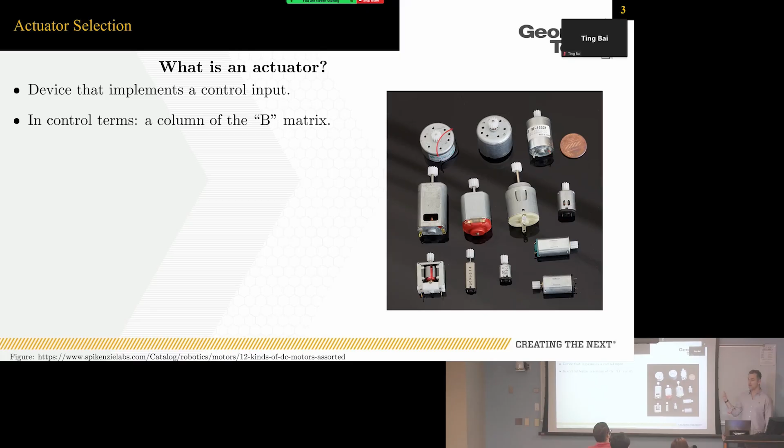If you have a linear system, okay? So if you have a linear system, x dot equals Ax plus Bu, the columns of the B matrix actually tell you the actuators, and your u actually will move those actuators.

Okay, so let's describe the first part of the talk, which is actuator selection. Actuator selection, why do we want it? The actuators, again from your class, are the implementation of the control inputs. They have to guarantee a sufficient level of controllability. So you have to make sure that I'm able to control my system when I go from point A to point B.

And of course, my research also takes care of resiliency, and this resiliency can be to faults, attacks, failures, and so on and so forth. And of course, I want to do that while I optimize the performance. So these are the three important things that I need to take care of when I do actuator selection.

Of course, everything though is model-based. If you check any paper on actuator selection, this is actually a very hard problem because the complexity increases with the number of actuators. And the complexity increases even more when you have to describe the model in a dynamical system way. So let's see how we can avoid doing that.

As I said before, in CPS, in cyber-physical systems, the system models are unavailable, or they might be inaccurate, or they can be time dependent, so they change over time. That's why we want to do actuator selection that doesn't involve the system models. So this gets me to the magic word here, which is called data-driven.

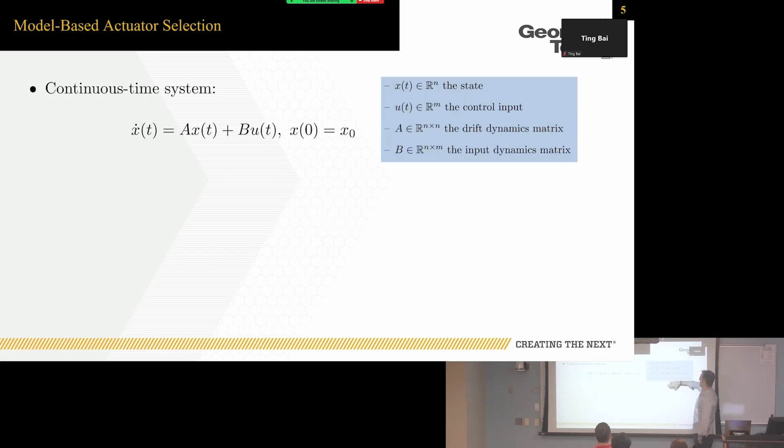Okay, so let's start putting some math now. We have done it for linear and nonlinear systems, but in linear systems you have a closed-form solution, you know how to compute it, you know it's actually correct. So let's go back to our 101. You have a classical dynamical system where x is the state, u the control input, and A and B, the drift dynamics and the input dynamics.

So let's see, if we had the model, what we can do when we do actuator selection. Remember, each column of the B matrix is an actuator. We have a fixed component, which we will call B0, the actuators that are already part of the system, and another component, which we will call B mathcal B, the actuators that need to be selected.

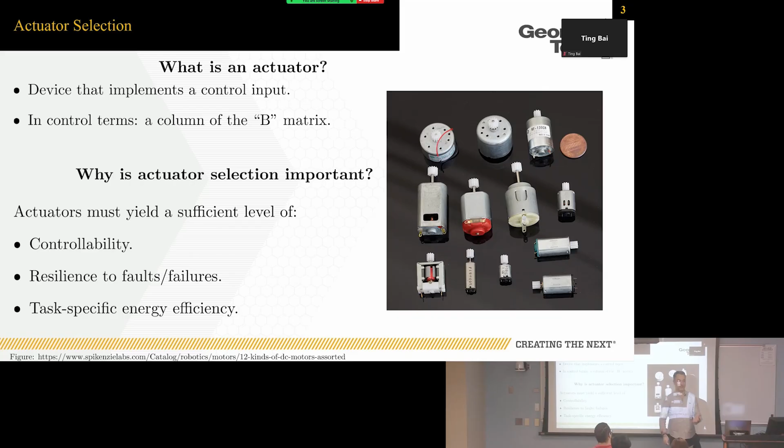So why would somebody need to select these things? Because of controllability and resilience. When I put more actuators in the system, I can get more controllability, more resiliency, and so on. Okay, let's go back to the math. I start with B0, and I'm going to play with this matrix here. So this is our problem for now: I want to choose these actuators here.

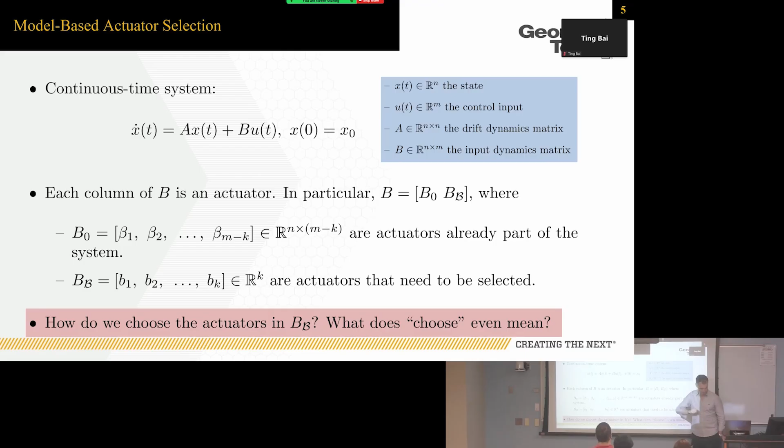So let's see what we mean. We have a pool of actuators, let's say there are n of them, and I want to select the best of them. In other words, k, a subset of n, and I want to select the best of them to incorporate into my system. So if I want to select the k best of them, I have to maximize the controllability.

Every time I want to incorporate more actuators into the system, I want to maximize something that quantifies controllability, and I want to do this optimization given that I have to pick k of them. Very simple optimization. Then, after we solve this optimization for B, I can set this B mathcal B there with these actuators.

Any questions? Okay, so now let's see actually how we can quantify controllability. So again, we go back to our optimal control classes, and we say, okay, I will define a minimum energy problem. And here you see that I only have the U here. And I do that on a finite horizon given my dynamics, initial and final condition. And of course, as you can expect, more controllable systems have smaller optimal values, right? Because I optimize this.

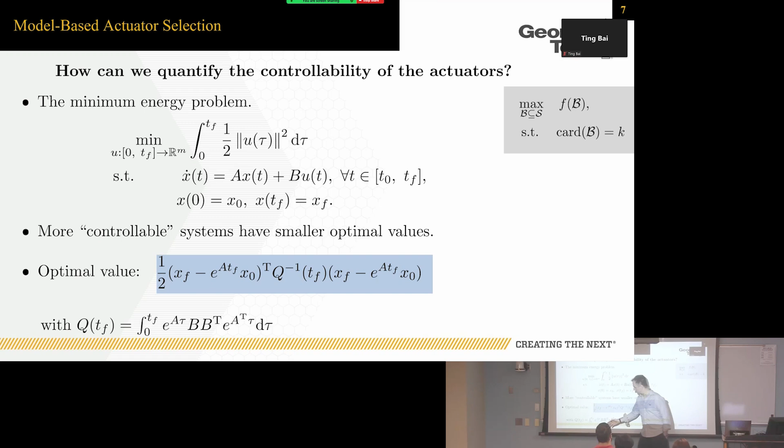So let's see. For now, I will try to model this f of B. The Gramian. Let's see what I can do with the Gramian. This Gramian will quantify how good my B matrix is, because I put the different components there, and the value of this Gramian will quantify how good my B is. So, as you can expect, you see Q inverse: a larger Q is better, a small Q is worse.

If I want to maximize something, let's choose the f of B that I want to optimize for my actuator problem to be the trace of this controllability Gramian. So eventually, if I have the model, I will take this, put it here, then do my actuator placement problem. But of course, this requires all the Greek alphabet, like alpha, beta, or A, B. So for now I will motivate through the model-based framework, and then I will do the model-free. So I will maximize this trace, given that my final time still is free.

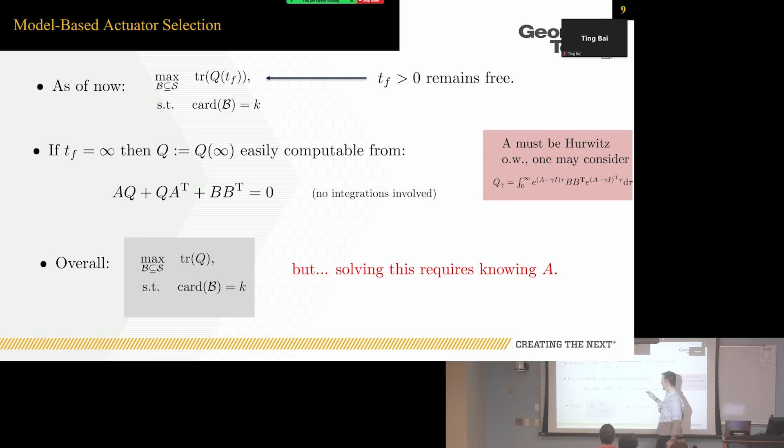So again, I have this problem now, and I know what this f of B that you saw before is, but solving this requires knowing A and B. So let's see what more we can do. We can be inspired by reinforcement learning, as you saw before. I want to find a way to solve this Lyapunov equation forward in time, without requiring A and B. So let's see. For now, we know that reinforcement learning, up to now, can solve some specific form of Lyapunov equation.

So you see that I have these little boxes here. Why? Because the transposes are the wrong way, right? A transpose P plus PA and so on. Every time you want to solve a Lyapunov equation with reinforcement learning, you have to have it in a specific form. This one doesn't follow the form. Again, the Lyapunov equation is A transpose P plus PA plus so on. So now, wrong term, wrong.

So let's see how we can actually start working on this one. For now, as I said, we can try to see what is the model-based, and then try to bring it to a model-free framework. So this is just a straightforward closed-form solution for the theorem if we had the model.

What you want to see here also is that if your A is Hurwitz, you have the P there, but if your A is not Hurwitz, then you move them around, as I told you before. So this gamma is when I move my eigenvalues on the left-hand plane by using this weighted Gramian. Again, remember that this one, which is in the correct form, is almost the derivative of x. Almost. So let's see what we can do.

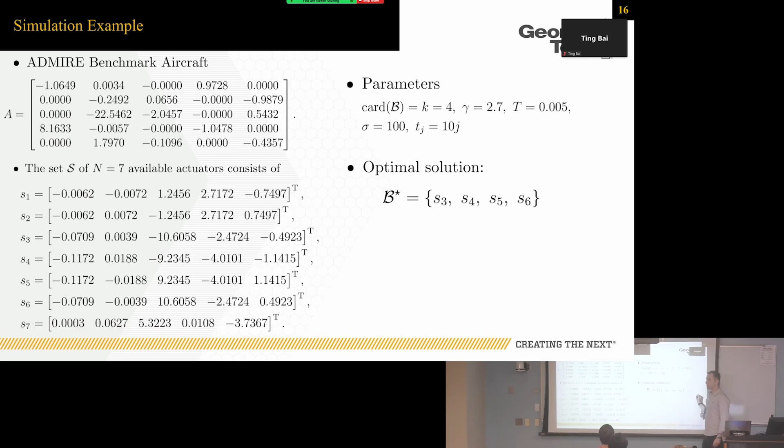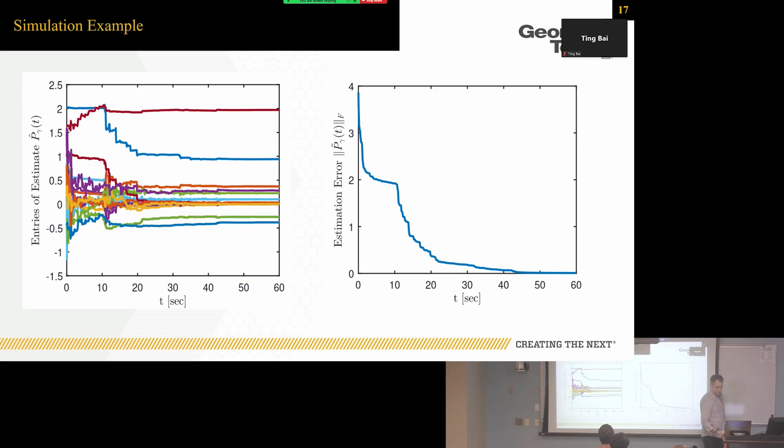So I want to see now if my learning algorithm, without knowing the model A and B, will actually converge to this optimal solution without any information, in real time. Remember that I had to estimate the entries of the P, which is the Lyapunov function. You see here that the error eventually goes to 0. Again, this is the Frobenius norm. These are all the components of the P. So this is the actuator selection. Remember, which ones will we converge to? Let's go back.

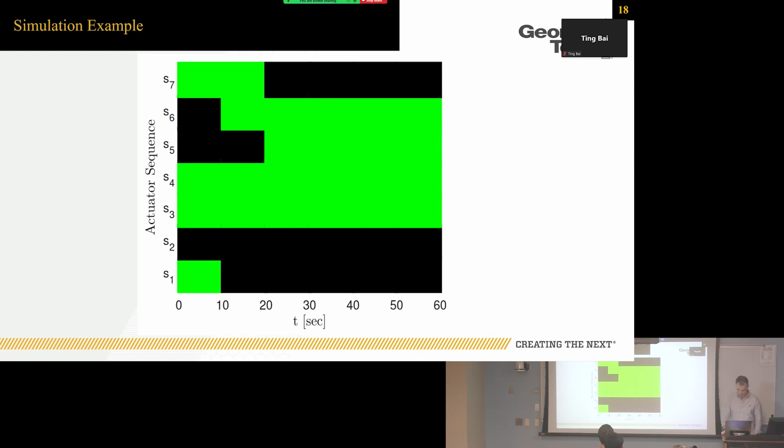So, what we did here up to now is that we had the actuator placement without any adversarial input into the system. Okay? And I wanted just to quantify controllability. But of course, if I want to do actuator selection, and I have, let's say, some attackers that can potentially make me choose the wrong actuators, then I have to adjust some things. Let's see what I have to do.

Okay, so again, I can solve this thing as an actuator selection problem without requiring A and B in real time. So of course it's similar to before. Remember, I had the controllability gramian. So now, instead of having the controllability gramian, I have something that is known as the game-based controllability gramian, which is again one extra term, right? So instead of working with the controllability gramian, I work with the game-based gramian. Same things as before.

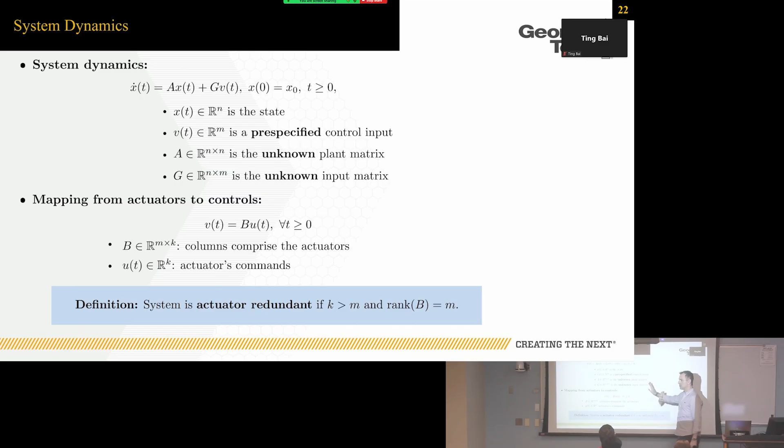We can say that the system is redundant in actuators. As you remember, I have more actuators than I need, and I want to incorporate them into my system if some conditions are true. So now, remember that I told you we don't do it on average, but across trajectories. So then we change the problem a little bit. Instead of doing actuator placement, we do actuator allocation now. Let's see what that problem actually is.

So I only choose the U to minimize this energy. As you see, it's even simpler than before, but let's see what's happening. The energy of the actuator. Yes. So I want to allocate the energy of actuators. So this one is the optimization problem now. As you can see, I have a little bit of freedom here, right, with W. Let's see what we can actually do.

Of course, this is a very simple optimization for now. I can have a closed form solution. I'm sure you can solve it here in 2 seconds. This is the closed form solution, and this is the optimal cost. But what I want you to see is the optimal cost has this extra component here. You remember what we did before, right? We played with B. So if I play with B, then I can optimize the cost even more.

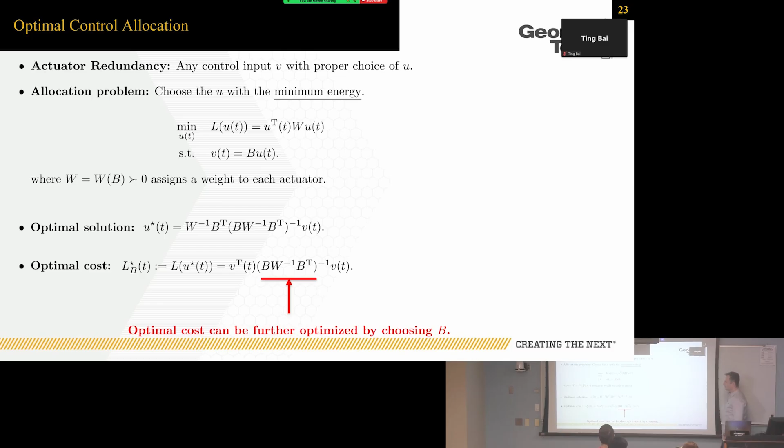So this is exactly the problem. This is what I get, but I know how to optimize B even more. So let's see how I can play with these variables now. Remember that I will follow similar things as you saw before for the placement, but for something that is called, in control theory, optimal control allocation. So again, I have a B matrix, which is composed of 2 different elements, B1 and B2, as before.

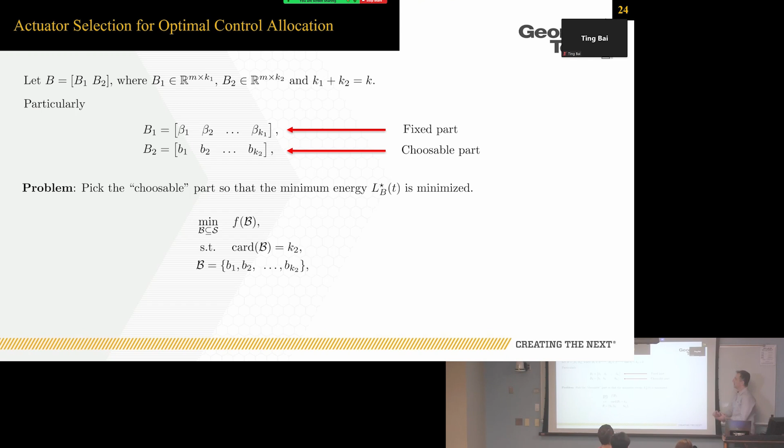So B1 has components, B2 has other components. Okay? So, from before, I have a fixed part and I have a choosable part. So, let's see actually what we can do. I only have freedom to pick the choosable part, such that the minimum energy that you saw before is minimized. So again, still, this is something that I have to pick, for now again.

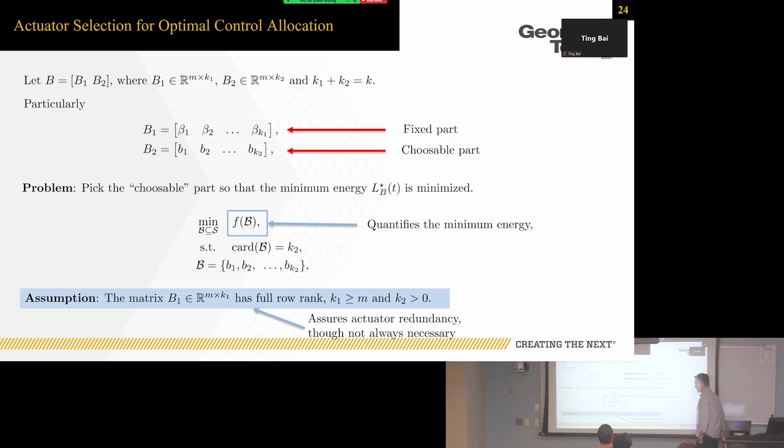But as you can expect, I can quantify this energy by incorporating this and playing with the things that you saw in the parentheses. So, again, these are just some assumptions. We assume that the matrix B1 has full row rank, which is some assumption that we need to have actuator redundancy. So, now recall.

Remember, this is my thing. So, if my V is not fixed, you see here, I cannot find it. I cannot directly optimize this one over B. So let's see what we can do. We can optimize though on average. So instead of doing that, I can optimize on average. So I take this middle part as you saw before, as you were expecting this result now. So my optimization will be on this thing.

So let's see a simple scenario. Let's say first that I know V, and there is an initial condition distribution like that. So let's see what we can do. I can optimize the energy directly over infinite horizon, and I can choose my F to be that one. Again, you can expect that one, right?

So remember, this is my LV that you saw before. You put it here, and then this is actually the closed form one. And of course, my F of B, if I want to solve it when my V is known, has to be that one. Of course, I can write this one in a static form using Lyapunov equations. So, here it is. These two equations actually solve this problem.

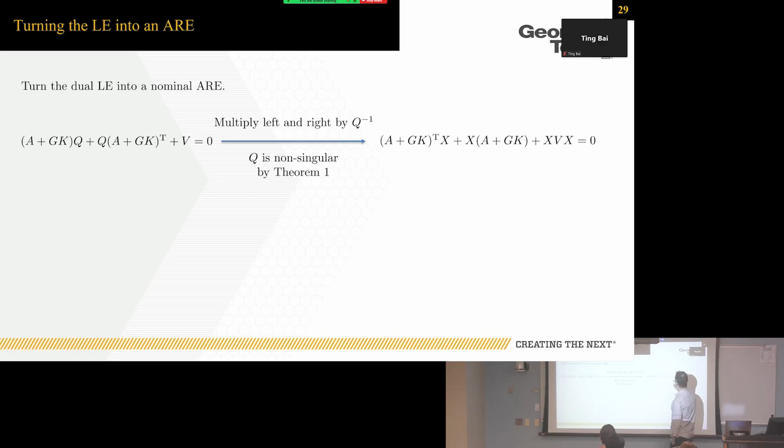And of course, I can do that because if I cannot, then the problem doesn't have any solution. And if I do that, then the equation becomes like that. So you see that the transposes appear in a better way. Of course, we can solve any algebraic Riccati equation, as you see here, in a model-free way, and I can solve it even with Kleinman's algorithm. So, let's see what we can do now. This is just a simple policy iteration to compute this Q inverse.

So what this means is that I solve, I wait until this converges, and then I update it. Okay. And of course, we have a proof that, remember that because the transposes appear in their own way, this is not an actual Lyapunov equation, but it's a dual Lyapunov equation. So it doesn't require the system A to be stable, but it requires the system A to be anti-stable. That's why you see my A over there, my minus over there.

And of course, this is very different because it doesn't have a constant term. So it's different than a conventional Riccati equation. So everything else now is the same. Again, remember that I converted this to an anti-stable Riccati equation. And then I can put the known and the unknown parts in a vectorized form. I can call everything else an activation function, and I can solve it with your favorite thing. We can solve it with least squares, recursive least squares, gradient, and so on and so forth.

Okay, so this is just some assignment of variables. Don't worry too much about those. So of course, in order for me to solve that, I have to guarantee some things which are similar to the persistence of excitation conditions before. It means that I have enough data to solve the problem, in other words. And again, after we put everything together, you can have a model-free procedure to estimate this one. Everything is stable. So let's see how this can work.

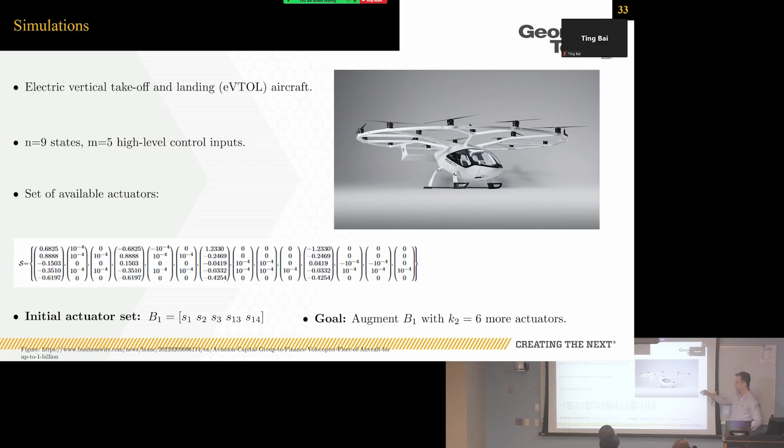And I have an initial set, I think probably I have about 14, I don't remember, but you can count them. So the initial actuator set is 1, 2, 3, 13, and 14. And I want to augment my matrix with 6 more to do optimal control allocation. And I want to do that in real time without any information about the system. So again, we can have the cost function as you saw before. I can pick my parameters. This is the noise that I can add to my control input.

So for now, I designed 2 algorithms, right? One that does actuator selection, and one that does optimal control allocation. And all these things are in a model-free way, and we proved small-disturbance input-to-state stability, robust to input noise. So, several papers on that.

How much time do I have? About 10 minutes. Okay, good.

Okay, so now let's take it one step further. Another difficult problem that we deal with here is we want to do sensor placement. Whenever you do sensor...

Can I interrupt? Sure. About the previous one, I have a burning question. In the noise that you add to the control input, what's the compelling reason to add the noise? So this is the persistence of excitation condition. You want to explore the state space, so you want to move your control input around. It's like exploring the state space. It started from adaptive control when you tune gains online, because you don't want to get stuck in some local solution.

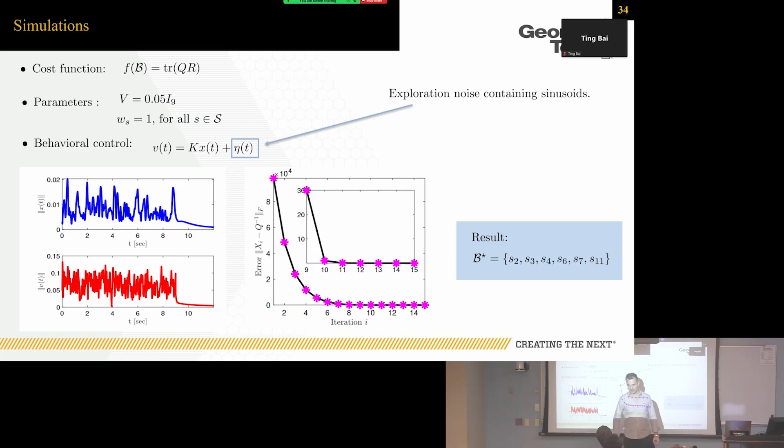So, now, let's see how we can do sensors. By the way, we will do that also in discrete time. Okay? So for sensors, it's even more difficult. Why? Because I have my output, right? I don't have complete information about my state. So somehow I need to find ways to do this in a model-free way. Again, in this one, I don't know A, B, and C. Okay, let's see how we can do that.

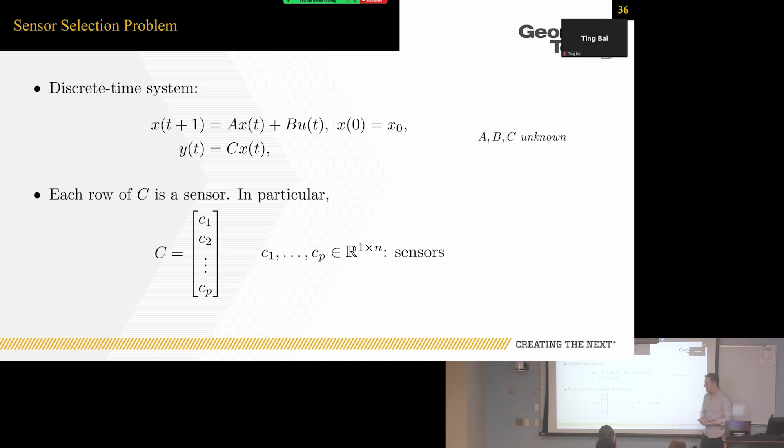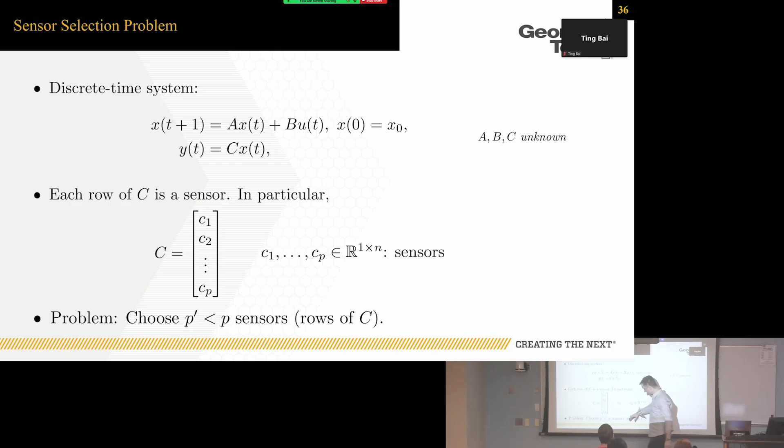So as you saw from before, you remember the B's are the actuators, the C's are the sensors, okay? So these are my sensors, right? And every component here has a dimension of 10, right? So, let's see. Of course, I can choose something that's smaller than this P, which we can call P bar, or P prime, okay? So from all this matrix, I can pick a subset of it. Before we chose columns of B; what we do here, we choose rows of C.

So, similar to before, what I have to do is pick a selection matrix to activate different parts of my C, okay? Let's see how we can do that. Again, somebody can ask about observability. Of course, I know a sensor set such that my system, with the choice of the selection matrix, is observable. Okay, let's see what we can do.

How do we define, though, the best sensors? As you saw from before, you had the U here. So the best sensors is by picking your Y's, okay? Very similar to before. So I want to optimize that, but now I want to maximize this H2 norm. And if I maximize that, it's actually equivalent to the trace of this, which is equal to the trace of that. And of course, the WC and WO come by solving these equations. And again, your A is just a discount factor for now.

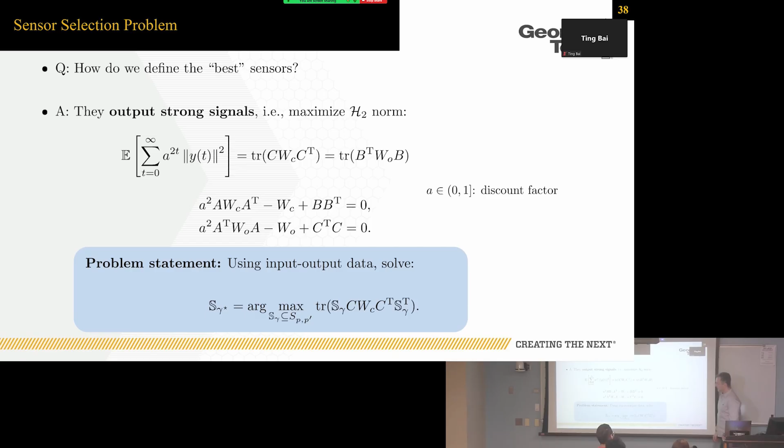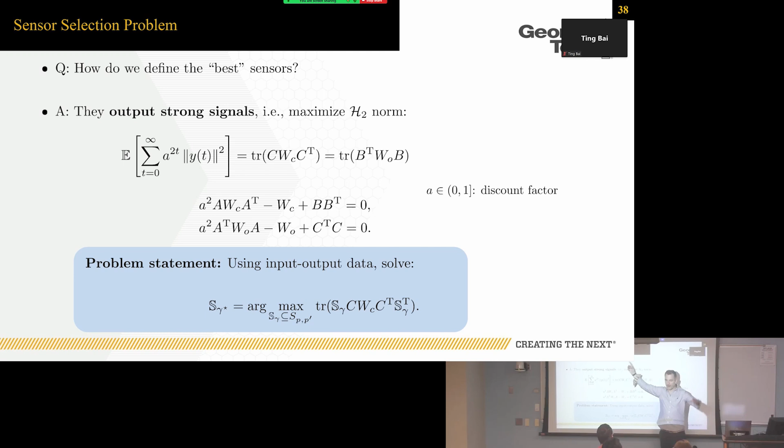So what I want to do now is do that only with input-output data, completely data-driven. So my problem statement then is to pick these S's such that I maximize this one here. Remember my F before, right? So I want to maximize this. As I said before, in actuator selection I want my X. Here I can only measure partial state because I measure only my output signals, okay?

But if you go to your undergrad controls class, you know that you can reconstruct your state based on input-output. So you can write your state as a combination of controllability, observability, and a Toeplitz matrix with Markov parameters. This is my controllability, this is my observability, this is my Toeplitz matrix, and this is the way to write it. So zeta is all these matrices together; you can see all the equivalences here. So you have a dependence on U and a dependence on Y, and your zeta are all the previous inputs and outputs.

So this is a way to write your state with respect to inputs and outputs. Pretty straightforward. Also, you know the work of Willems, right? Willems also does something like that in a different way with the Hankel matrices. This is not really a Hankel matrix, it's a Toeplitz matrix with a bunch of Markov parameters, but same logic.

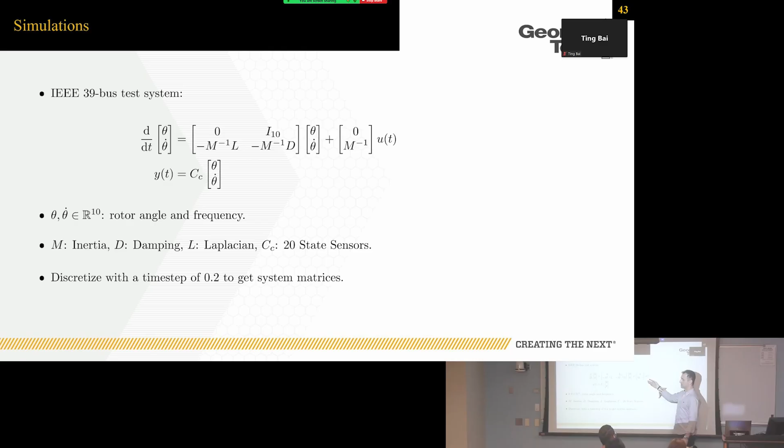So now, because my background is electrical, although I'm in an aerospace department, I have to pick something like a power system too. So let's say that I have this IEEE 39 bus test system, where I have rotor angle and frequency, which have 10 states each, so this system is 20 states. And then I have 20 state sensors, as you can expect. Of course, the algorithm I described to you is in discrete time, so I have to discretize the system and then get my discrete time equivalent.

So the initial set of sensors I start with is 1, 3, 4, 6, and 8, and I want to augment that with 7 more out of all this set. You have 20 sensors, remember? I start with 5, and I want to incorporate 7 more from the pool of 20 sensors in total. Actually, they're not 20, they're 15, right? Because I have already picked other ones there.

So as I said before, I can pick a finite horizon volumetric cost with a discount factor, and I can pick a past horizon of 6. This means how many data I will use before. You remember I had my controllability and observability; I wrote my state with respect to previous data, which is observability, controllability, and Markov parameters. So this means that I will pick up to 6 previous data. This is my past horizon.